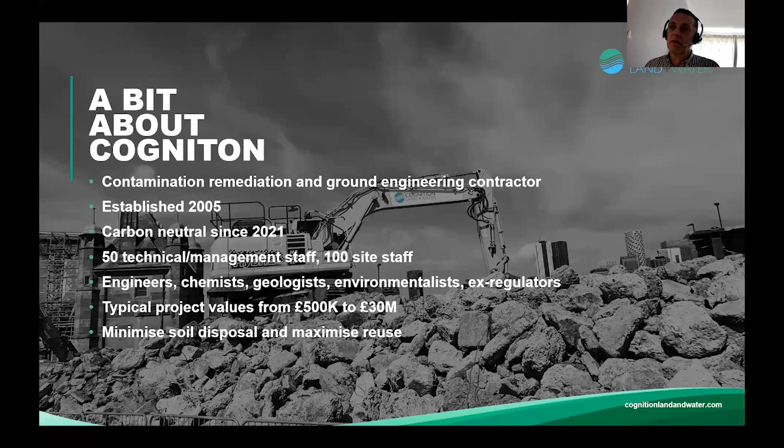Typical projects range from about £500,000 to £30 million in size, and minimizing soil disposal and maximizing reuse on construction sites is, in my mind, everything that we do. That's where we have the greatest impact by far in the work that we do, avoiding disposal of soils and filling up landfills unnecessarily. So what is the issue?

Well, it is a huge issue in our industry. Waste construction soils are equivalent to five times domestic waste that's generated in the UK in an average year. 80% of construction waste is soil. Soil is a hugely valuable resource. We really don't want to be creating a waste from that material and disposing of it.

60 million tons of waste soil are generated each year in the UK. I should say that these are government statistics from 2018, the most recent data available. And shockingly, only 12% of waste soil was what's officially called recovered in 2018. Personally, I think we should be ashamed of ourselves and embarrassed as an industry that this is what we're doing.

Soils make up 58% of the waste that's received by landfills. And these sort of statistics are really terrible. We need to be doing a lot better, but hopefully you'll see later on in the presentation that there are lots of hurdles in the way of achieving better in terms of those numbers.

Some would say that waste regulation is complex, time-consuming. Yes, it is. There's no doubt about that, but it's not insurmountable. It's not beyond the wit of man for us to get over this issue, the law and the regulations. Some say that contaminated soils can't be reused on sites. I disagree completely, and we've got lots and lots of examples where contaminated soils can be remediated, cleaned up, made suitable for use and reused on construction sites where they present no risk to the environment or future users.

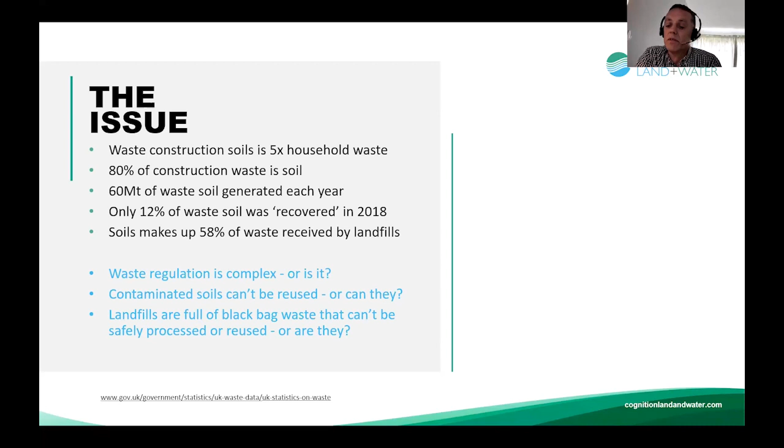And some say that landfills are full of black bag waste that can't be safely processed or reused. We have lots of experience on regenerating, remediating old landfill sites and bringing them back into beneficial use. And that is absolutely not the case. On most of those sites, 80 to 90% of the material that's in those landfills is soil that can be recovered, reused on sites. So let's do some debunking, as I've said.

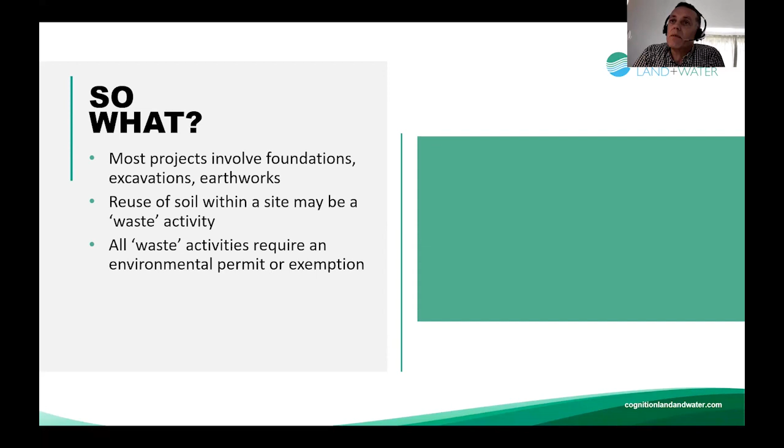So you may ask yourself, why is this important? Most of the projects that you and I get involved in involve foundations, earthworks, excavations, generating soil. You may not know, but reusing that soil within a site may actually be a waste activity. If you don't control, manage, record that process, you may unwittingly be creating a waste and depositing a waste. And there are implications to that that I'll talk about in a bit. And all waste activities either require an environmental permit or an exemption from an environmental permit.

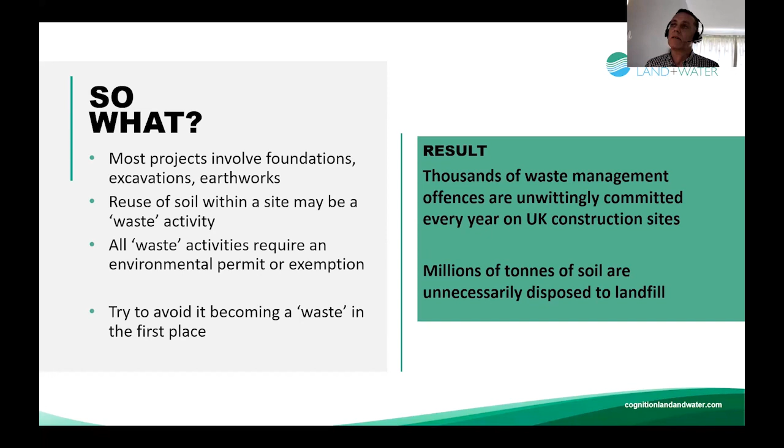So the result of this is that in the UK, thousands of waste management offences are unwittingly committed every year on UK construction sites, and millions of tonnes of soil are unnecessarily disposed of to landfill. I have lots of examples. Those of us in the contracting side of the industry, I can give you plenty of examples where we really should be reusing those soils on site and not putting them in landfills. And the easiest and best way to avoid that is really to avoid it becoming defined as a waste in the first place. Again, I'll explain in a minute how we can do that.

First of all, though, I'm going to give a shameless plug for an upcoming guidance document from CIRIA, the Construction Industry Research and Information Association. I've been involved in this on the project steering group for this guidance document. Cognition have also funded it because we see it as being extremely important. This is a way of promoting and simplifying opportunities to reuse surplus soils on site. The idea is that it's concise but comprehensive, up-to-date and interactive guidance that explains the whole process of soil management from cradle to grave. So keep an eye out for that. It'll be published within the next few months.

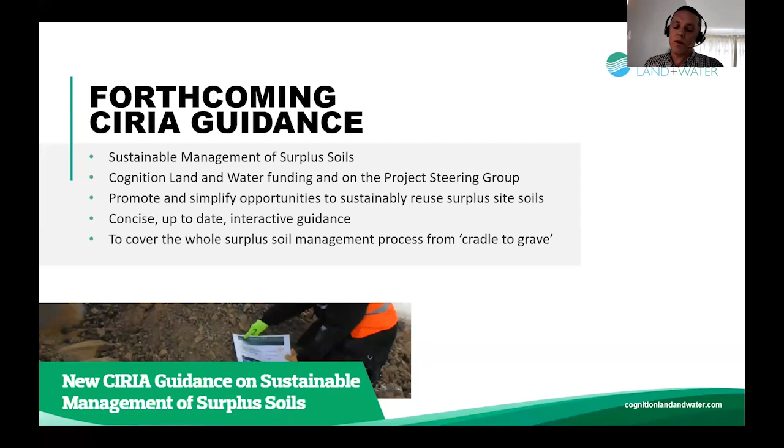So some of the regulation options. Before we go into that, it's important that you understand what is a waste. And there is a legal definition of a waste. Lots of you will have heard of this before, I'm sure. And really discarded is the important word here. So a material is only considered a waste if it's discarded, if you intend to discard it, or if you're required to discard it. And that's enshrined in law.

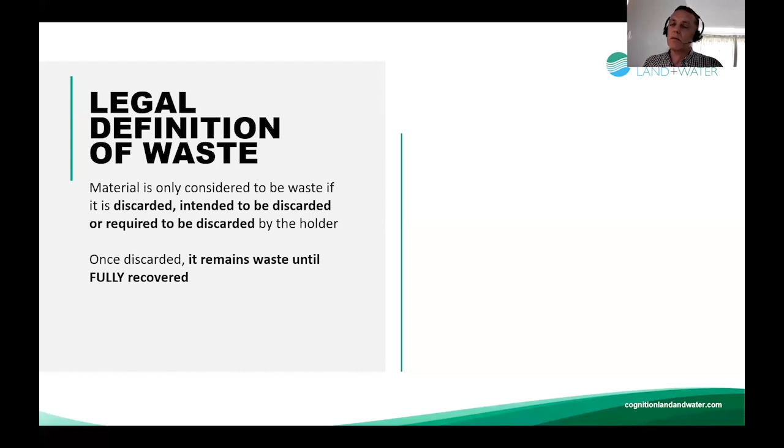But once a material is discarded and it becomes a waste, it remains a waste until it's fully recovered. And there are only certain ways in which that material, that soil, can be recovered. It's important to know, therefore, that waste is not related to its chemical composition. A material can be contaminated, but it can still be suitable for use on a site if used in a particular way, or it can be remediated and treated to make it suitable for use. It's not necessarily a waste if it's contaminated. Or even if it has a value to you, if you're still discarding it, then it still could be a waste.

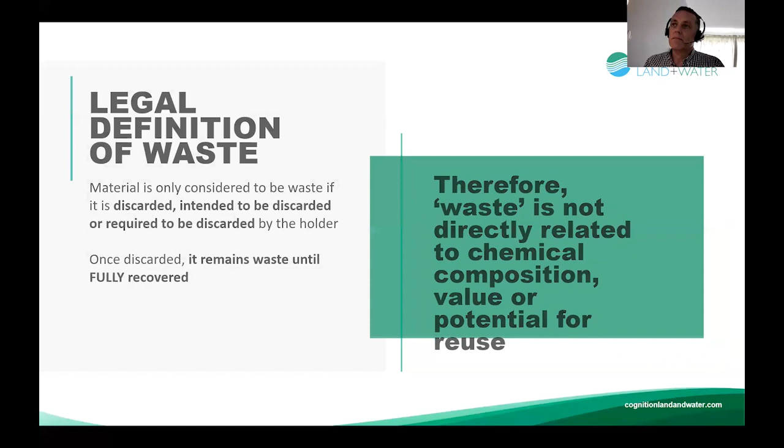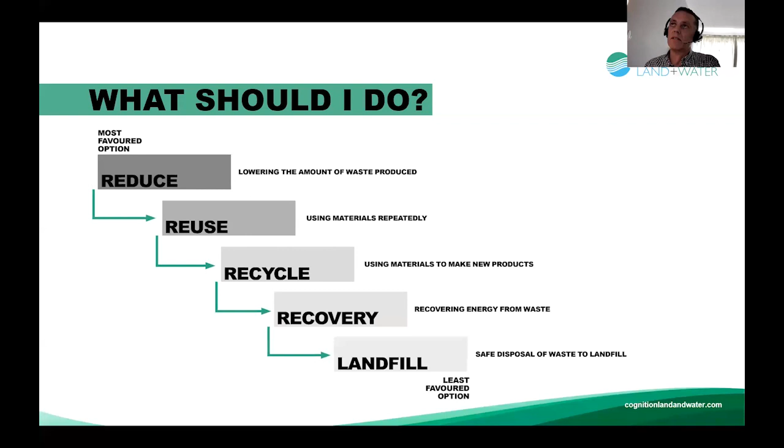So what should you do? Hopefully you'll all be familiar with the waste hierarchy. What we really need to be doing is staying as high as we possibly can in the waste hierarchy in terms of the management of soils on construction sites. So reducing the amount of waste that we generate. And if we can't reduce it, then we reuse it, recycle it, recover it, and so on. And the last option absolutely should be landfill. That's the least favoured option, sending soils to landfill. So I'm going to run through that sequence, reduce, reuse, recycle, recover, and dispose, in the following series of slides, and give you examples of how that process is regulated.

The top one, and the one that I think is really the best tool that we have in the industry at the moment for reusing soils on site, and a tool that avoids a soil being defined or classified as a waste in the first place, is something called the DoWCoP. This is the Definition of Waste Development Industry Code of Practice. It was introduced in 2008, so it's been around for about 15 years or so. It has been revised. There's a new version that's imminent. It's been with the Environment Agency for quite a while. We're waiting with bated breath for that to come through, version 3.

Originally, this document and this process was approved and supported by the Environment Agency, but I'm afraid to say that the Environment Agency, in some respects, seem to be having cold feet in terms of the use of the guide. And things have changed recently in terms of the acceptability of using this DoWCoP process in certain situations, which is unfortunate, I think, because, as I said, I think it's the best tool we have.

By applying the process in the DoWCoP, soil does not become a waste on a construction site if it achieves these 4 key principles. The first one is that it needs to be protective of human health and the environment, and everyone would agree with that. It needs to be suitable for use without further treatment. Again, that's fine. If the material is suitable, then it can be reused. It can be treated under, let's say, a mobile plant permit before it's reused. And those two in combination, the mobile plant permit and the DoWCoP, could allow for a material to be reused on the site.

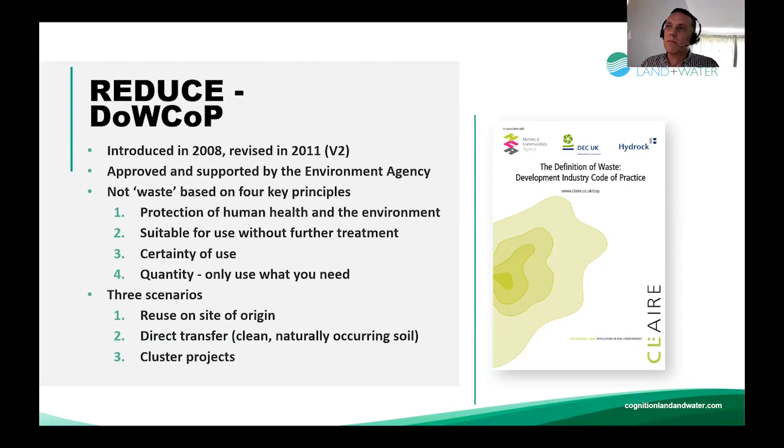Again, unfortunately, cluster projects are something the Environment Agency are scrutinising extremely rigorously at the moment, and there seems to be an issue with accepting cluster projects in many cases. So what's the process under DoWCoP? It's very straightforward, which is, I suppose, one of its attractions.

You produce a remediation strategy, as you would normally, I suppose, on a site. Or if there isn't a remediation strategy and it's a simple project, then you can produce a design statement, which is a very simple statement to say what the composition of the material is, and to say that it's suitable for use. The key document for the DoWCoP is a materials management plan,

and that outlines the parties involved, the nature of the development, the sources of the soils, where they're going to, how you're going to track that and record it, and all that information goes together into a single document, a verification report, which you produce at the very end of the project and submit to CL:AIRE.

But before that, once you've produced the materials management plan, you then appoint a qualified person, and that's what I said I was earlier on, a QP. That person has to be completely independent of the project. They don't have to be independent of the company. They can be within the company, but they can't be involved in the project.

And that person has a certain level of understanding, has gone through an exam process with CL:AIRE to demonstrate that they understand the application of DoWCoP. They review all the information. They submit the declaration to CL:AIRE, which is the organization that manages the process. And all of this can be done in a week or so. Bish, bash, bosh, as I said. Very straightforward, very, very easy.

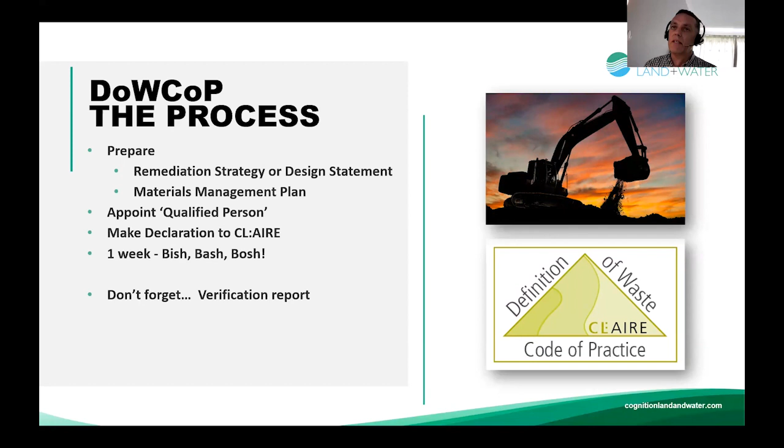Moving on to reuse. There is another option where materials can be moved between sites. I've called this Tinder for surplus soils, and basically that's what it is. It's a matchmaking process where donor sites are connected to receiving sites, and those soils then don't necessarily become a waste, and they can be transferred between sites.

But you need to be careful, because there are certain instances where they may become a waste, and an environmental permit is required. Certainly duty of care regulations would apply. And there are several different organizations that manage these registers of donor and receiving sites. CL:AIRE's is the largest one, their register of sites. But then the Soil Hub as well, which was launched quite recently. The Supply Chain Sustainability School has one as well. And there were a number in the past, NISP and WPE, which I'm not sure operate anymore.

Moving on to recycling, we're going down the waste hierarchy now. Well, sort of going back to reuse slightly, if you don't want to get an environmental permit, there is an option to get a waste exemption, an exemption from environmental permit. Those are very limited circumstances. One example is U1, which is the use of waste in construction. It's limited in terms of how much soil you can use, 1,000 tons, or 5,000 tons of crush, say 6F2. It's limited in terms of how long you can store a material on site, and that exemption must be registered with DEFRA.

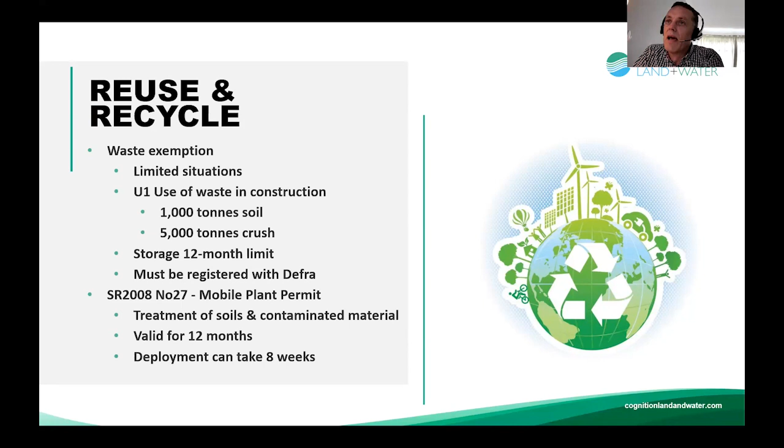In terms of recycling, we can use a mobile plant permit for treating soils or contaminated material on site and making them suitable for use. Cognition operate a mobile plant permit. That's a standard rules permit, and it's specifically deployed on every individual site. You go through a process of demonstrating that you have full control of any potential environmental impacts. And that permit is then valid for 12 months from the date you start the works. Worth noting that the deployment can take 8 weeks or even 12 weeks sometimes. So you need to plan and allow for that as part of your works program.

Recycling: this is a really good example of recycling of construction arisings. It's now called the Environment Agency Quality Protocol; some people may know it by its former name, the WRAP protocol. There are a number of them, but this one relates to aggregates from inert waste. The best example really is production of 6F2 or crush from demolition material, concrete crush or brick.

As I said there, it allows the processing of an inert granular material, only granular fill. You need to prepare a method of production, which outlines strict compliance and verification requirements to demonstrate that the material is what it should be. Once it's gone through that process and you've done all your verification and compliance, that material is no longer a waste. It was originally; it's no longer a waste now. It's a commodity, it's a product, and it can be sold from the site.

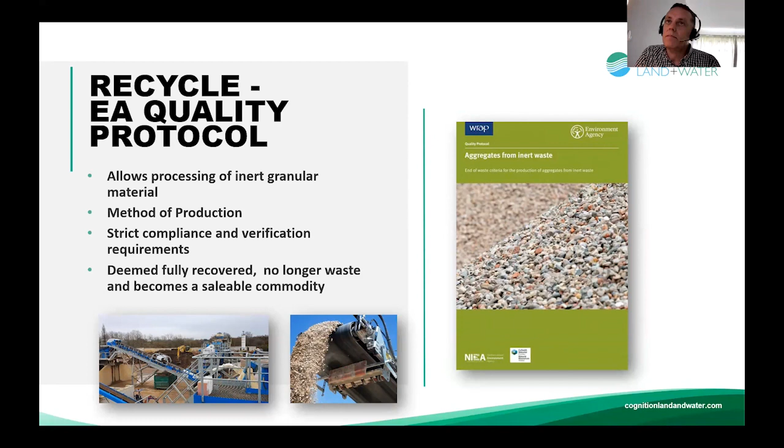Another option for recycling is soil treatment facilities, and there's a whole network of these all across the UK. These are off-site soil treatment facilities, permanent facilities set up to treat soils if you don't have space on your own site to remediate. They use all sorts of different technologies: bioremediation for hydrocarbons, soil washing for heavy metals, sorting and processing, cement stabilization or lime stabilization to lock in contaminants.

The great benefit of this is that even though they're not cheap, they are competitive when compared to landfilling. The reason for this is that you don't pay landfill tax when you send a material to a soil treatment facility. A few slides down, I'll explain why landfill tax is such an important factor.

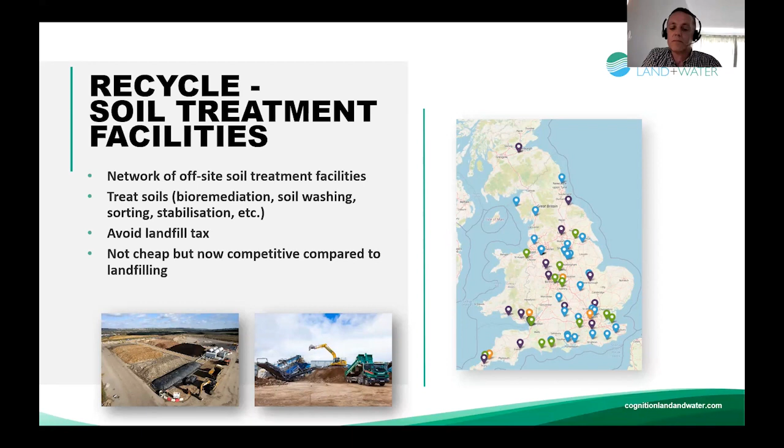This is the one that we're really struggling with in the industry at the moment, and this is recovery. This is where you're looking to replace a non-waste material, such as a virgin gravel from a quarry, with a waste material that performs the same function. Once the contaminated soils are treated, they're not waste when they're incorporated in the final works. So you produce a waste recovery plan, get your deposit for recovery environmental permit, and once the works are completed, the recovered soils are no longer waste.

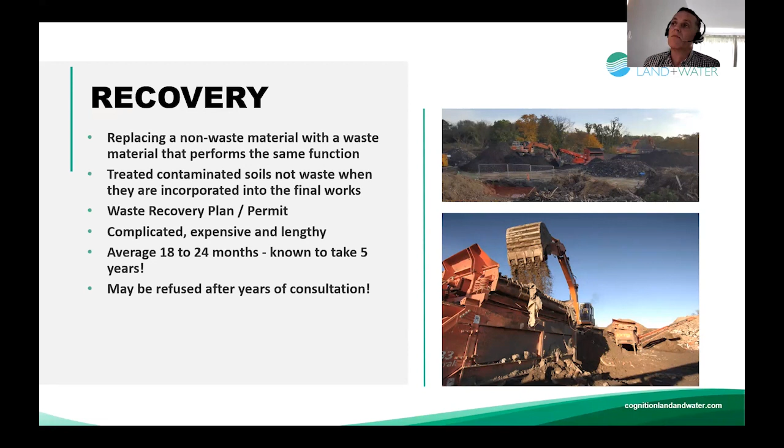However, the problem is that the process is extremely complicated, expensive, and takes forever, to be honest. At the moment, the average is a year and a half to 2 years, but I've known examples that have taken up to 5 years to get an environmental permit in place. I know an example where the consultation lasted for 3 years, and they just couldn't get it over the line, couldn't agree the details of the waste recovery plan and the environmental permit, and it was thrown out, and the development didn't go forward. I think that's pretty shocking, really, and not the way that we want to move forward in terms of sustainable development.

And the last option: because getting an environmental permit or a recovery permit is so difficult at the moment, we are having to dispose of more soil than we want to, if the program of a development requires it. I don't know of any project that can wait 2 to 3 years to get an environmental permit in place. Landfill tax is currently £102 a tonne, which, as you can imagine, racks up very quickly. There are several different categories of landfill: hazardous, non-hazardous, and inert.

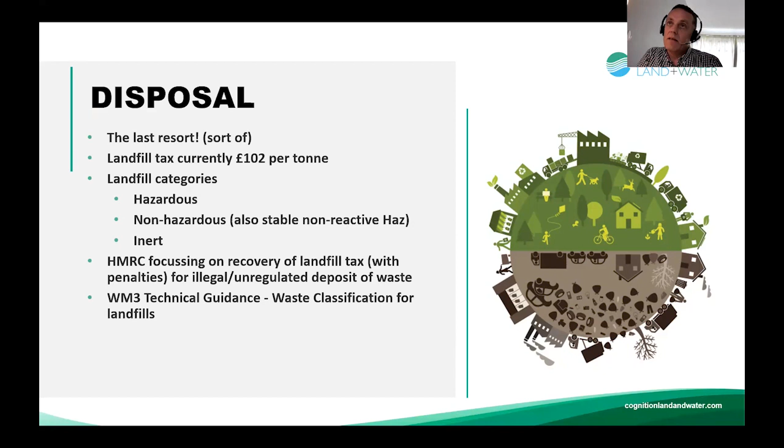It is important to know, as I mentioned earlier, that you may unwittingly be carrying out a waste activity on your site if you don't have the correct process and paperwork in place. HMRC have become very focused on this because landfill tax is so high. It's a big revenue stream for HMRC, so they're going out looking for sites that have illegally deposited waste and haven't regulated correctly. So those are the ways, going down through the waste hierarchy, that you can actually regulate waste.

But as I've intimated a couple of times, there are some key challenges for us as an industry. Probably one of the bigger ones, which is not the fault of the Environment Agency, is that they're hugely underfunded. You can blame your government and DEFRA for that, and maybe think about that tomorrow when you're voting, if that's not too contentious. In the Environment Agency, there is a huge backlog of environmental permit applications, which really is stymieing progress on this issue.

Waste legislation and regulation, I don't think, is suited to construction sites. It's really set up for your typical domestic landfill or an industrial process. I think we need a different system for construction sites. As I said there, we're trying to shoehorn soil reuse into the environmental permit system, and it really isn't working

at the moment. There seems to be a lack of pragmatism and understanding of the issues in some quarters of the Environment Agency and in the regulators, and a lack of clear guidance. And there are conflicting opinions. We've been waiting for, I think, 2 to 3 years now for version 3 of DoWCoP and some internal guidance from the Environment Agency, and it's just not forthcoming. So we're in the dark really at the moment.

And I think recently, DoWCoP is being undermined. It's a hugely useful tool in the industry, and I think it's the best solution, best tool that we have. But there is resistance to using it in some quarters. Some would say that the system, our DoWCoP, has not been used properly in the past, or has been abused. That may be the case.

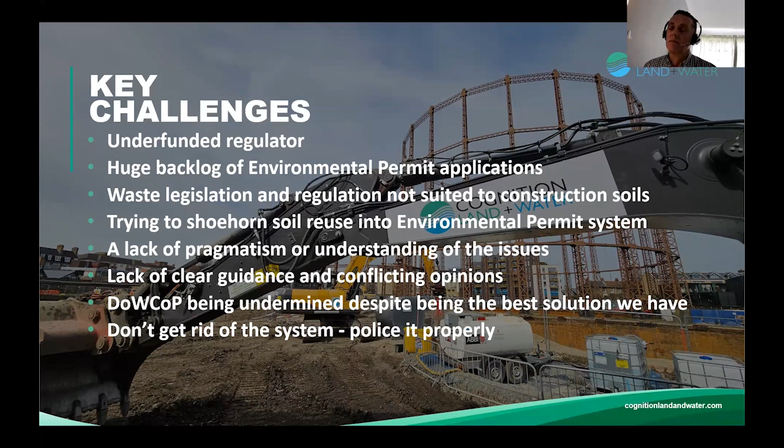Our industry isn't perfect, but I don't think you should throw out the baby with the bathwater. You don't get rid of the system, just regulate it, police it properly, convict people, take people to task if they're not doing it properly. As I said, it's a massive issue for our industry.

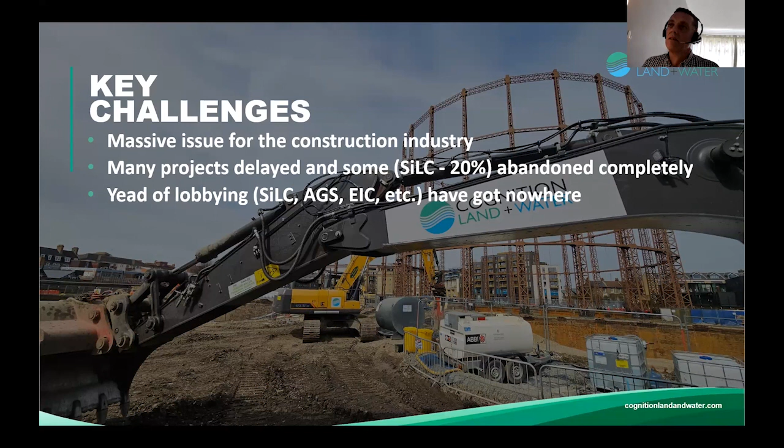Many projects are delayed, and SiLC, which is Specialist in Land Condition organization, did a survey recently and got a response that 20% of projects have been abandoned completely recently. And I know of 3 large residential developments with about 750 or so units that just haven't gone forward because they can't wait around for the permits, and the funding has been lost. There's been years of lobbying by SiLC, AGS, EIC, and we don't seem to be getting anywhere at the moment.

I'll skip past that because I'm running out of time a little bit, but I've got a few quick project examples that show how this can work well if it's managed properly and if the correct processes are used. This is a site that we worked on for 6 odd years, a 50-acre former commercial, industrial site that was redeveloped for 3,500 homes. We negotiated and agreed a remediation strategy with the Environment Agency.

And in the end, we agreed that it allowed us to excavate, treat, and reuse 1 million cubic meters of soil on the site from this formerly contaminated piece of land. 600,000 cubic meters were bioremediated or stabilized. And I think tellingly, the last figure there, less than 0.1% of soil was disposed of off-site. So basically, we reused everything on this site within the works.

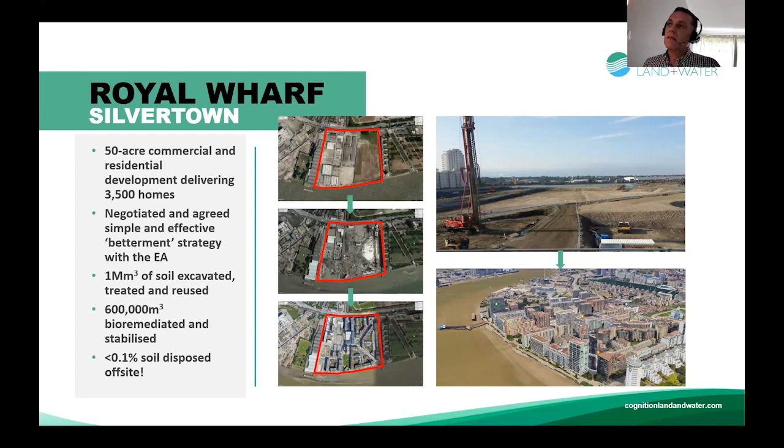A similar project, this one was for Homes England on the Isle of Sheppey, a 32-acre site, former chemical works, a steel rolling mill. And again, this was remediation of made ground, a small area of landfill. It also had poor ground conditions, so we had to improve the ground as well using prefabricated vertical drains and surcharging. All of this work was done under a mobile plant permit, but we also had a recovery permit. We did get an environmental recovery permit on this particular one for the processing and reusing of these materials.

But we were fortunate because there was already an environmental permit in place on an adjacent site. So all we had to do was to change the boundary and add in a few more specific details about the work that we were doing on our site. But even that took us 8 months just to get that amendment to the environmental permit.

In the end, we imported just over 55,000 cubic meters of soils for the surcharge and the cover system, and that was done under DoWCoP. And overall on these two sites, we processed and reused almost 450,000 cubic meters of soil. But interestingly, there is surcharge on the site, and there's still a question over the reuse of that surcharge material. This is a clean, naturally occurring soil that was brought onto the site under DoWCoP.

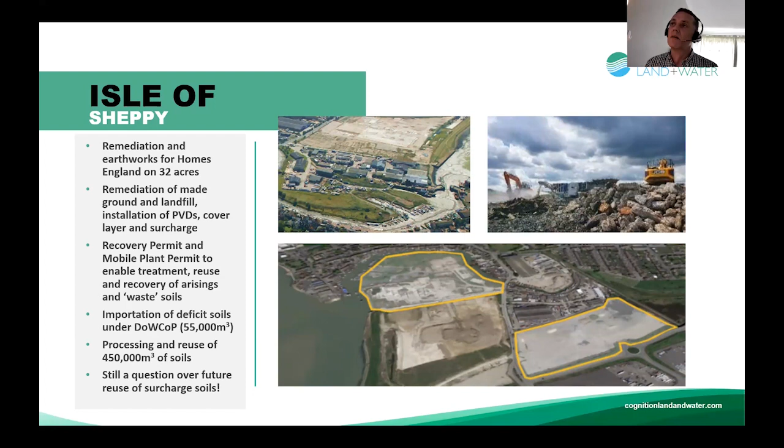But there's a question now as to whether that is a waste and what happens to that material. Can it be reused on the site? Does the environmental permit have to be extended again to allow that to be reused, or can it be done under DoWCoP? We haven't got to the bottom of that one yet.

I'll skip past that one because I am conscious of time. And then there's a last one, which is a gasworks in Kingston in London. This is one that we did a few years ago.

We developed and agreed the remediation strategy with the Environment Agency and the local authority. This involved the demolition of the gas holder bases and the structures, but it was contaminated, as you might imagine. We used bioremediation, chemical oxidation, stabilization of soils. All of those, basically threw everything at it to maximize the reuse of soil and minimize disposal. In the end, we treated 85,000 cubic meters and zero soil went to landfill. Everything was reused within the works.

However, we're working on another site more recently at Bethnal Green, and on that site, we're not allowed to do exactly the same process. Any contaminated soil that's above the agreed reuse criteria on that site has to be disposed of off-site. They can't be treated, they can't be reused within the works. Now, to me, this way it's madness. I think we really should be treating those soils and reusing them within the project.

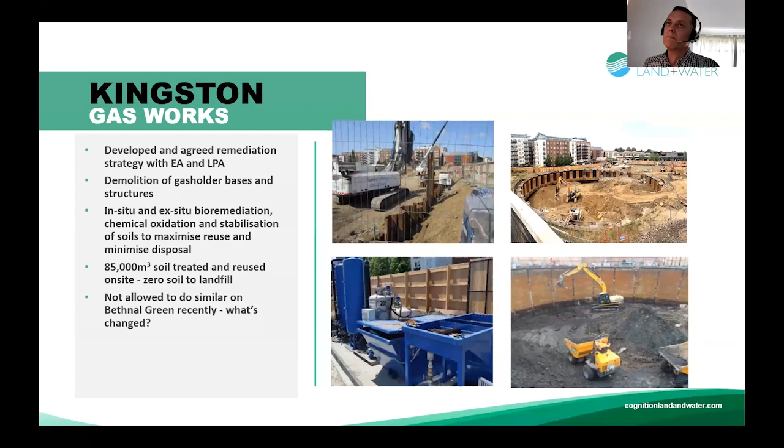So where next? Last couple of slides. I think it's really important that we raise awareness, and that's why I'm talking today, putting my neck out a little bit, really. I've been maybe a little bit controversial. We need to raise awareness, but also train people and understand how to use these processes properly. I think we need to lobby the Environment Agency, DEFRA, even the new Office for Environmental Protection, who are essentially the police for the Environment Agency. So we're looking to talk to them as well.

I think we certainly need to maintain DoWCoP, but I also think there's an opportunity to expand it, to specifically allow for reuse of landfilled materials if they're suitable for use. I'm not talking about digging up domestic landfills. I'm talking about sites that are suitable for reuse with large quantities of recoverable soils, and stockpiled soils as well. That's an issue that crops up quite a bit.

I'm no fan of Brexit, I can tell you, but is there a post-Brexit opportunity to redefine the classification of waste under UK legislation? Something that we're looking at. And really to understand from the Environment Agency why there is this change of heart in requiring the use of environmental permits on construction sites. What has changed? Maybe we could look at formulating a new, bespoke, simpler waste recovery permit that doesn't take 2 to 3 years to get in place. And being the eternal optimist, hope and pray for logic and pragmatism to prevail, both in the regulators, but also in the industry ourselves.

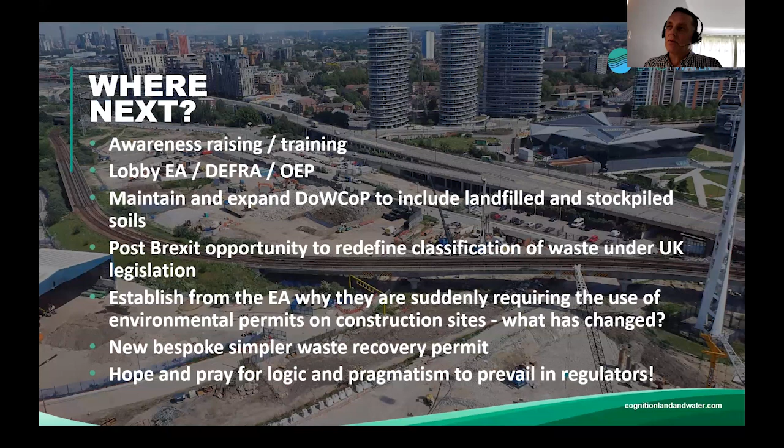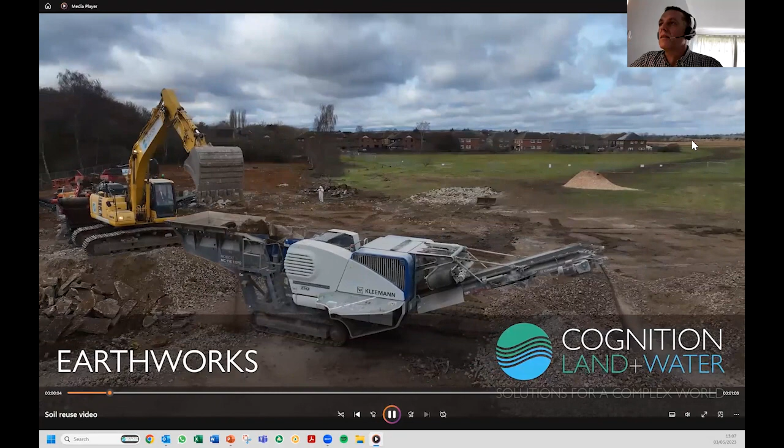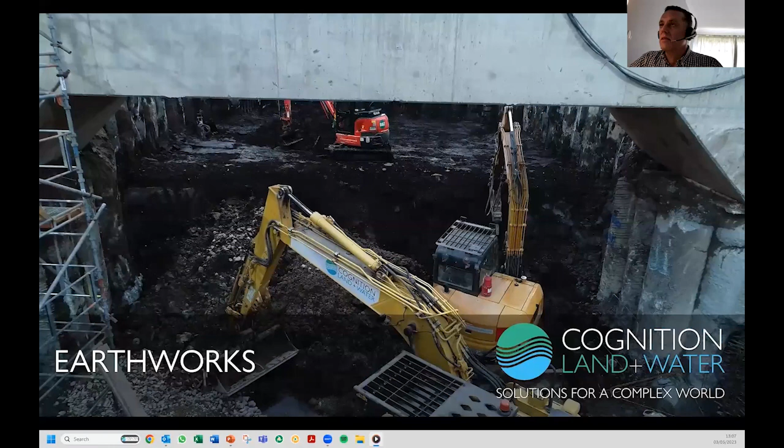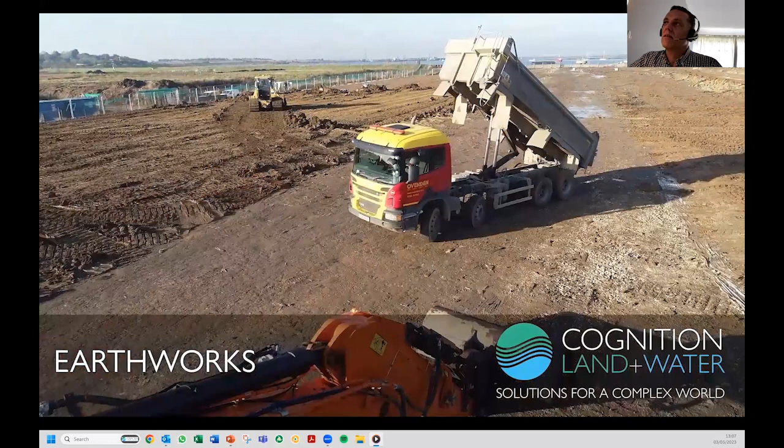I have a very quick video just to play. Hopefully this will work. Yeah, so these are just some examples of how we carry out reuse, processing, recycling of soils on various sites, using lots of different remediation technologies, and some simple technologies as well, such as crushing demolition arisings to produce 6F2. That last one was an excavation of a launch chamber for a TBM in Silvertown, where we reused all the excavation in the enabling works. We processed, treated and reused the materials on site under a mobile plant permit and under DoWCoP.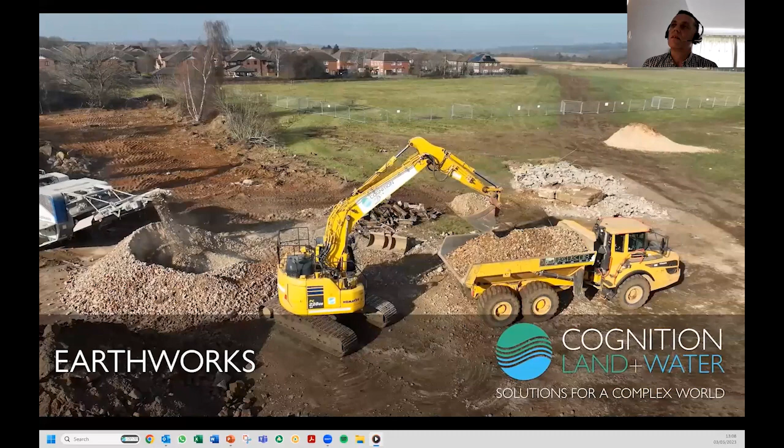This one is the site in Sheppey that I was telling you about. You can see the processing of materials, but then also that white geotextile there; the material that's on top is the cover system to protect future users of the site. All of that material was brought in under DoWCoP and used from other sites. And that's pretty much it.